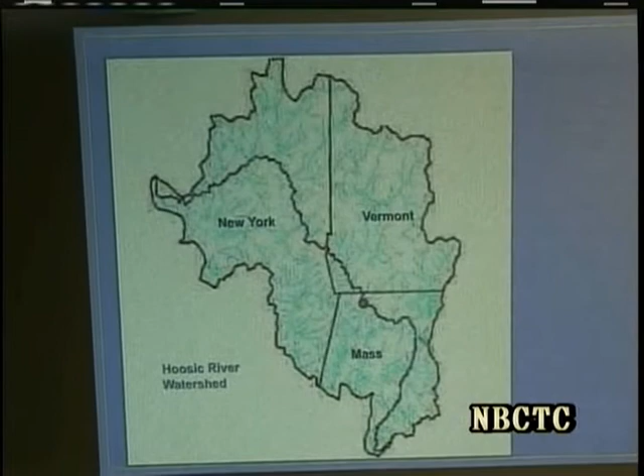Whoops. Ahead of myself. So this is the Hoosic River watershed. The South Branch, the main stem, starts in Cheshire, but the North Branch starts in southern Vermont. And what you should understand about a watershed is that it's all of the landmass that drains to a common point. So what's in the Hoosic River is all the rain or water or snow melt that's coming off from most of southern Vermont and Adams and Cheshire, all draining towards North Adams, and then it goes on to Williamstown and eventually into the Hudson and Long Island Sound.

Here in North Adams, the river has been highly engineered. Flood chutes were built as well as earthen berms to contain the river. So it's a very unnatural system. In the bermed area, it kind of looks like a river, but in the flood chute area, it doesn't. This is directly upstream of the chutes in the North Branch. It looks like a river.

And unfortunately, the river was channelized because of the floods. In the 30s, there were some devastating floods throughout New England. And in response, the community asked the federal government to help contain the flood damage. And their response way back then was to build physical structures that prevented the water from flowing into its natural floodplain.

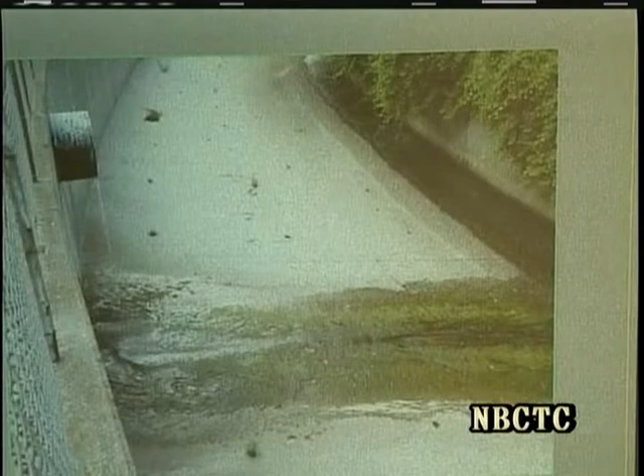So we have here a giant concrete sluiceway that's at a very prescribed slope that moves the water very swiftly and efficiently out of the river and does protect the city from floods. But it also destroys all river habitat and aspects that make a river a river. This section of the Hoosic is considered impaired under the Federal Clean Water Act as designated by the state of Massachusetts. It's on the 303D list, or impaired waters list.

And one of the contributing factors to that impairment is this engineered modification. So the chutes are a mixed blessing. They help prevent floods, but they do degrade the river. They do bisect the city.

And they are very helpful in preventing floods. We certainly saw that during the remnants of Tropical Storm Irene, where the flood chutes on the South Branch filled up a little bit more than halfway. On the North Branch, because there was so much rain in southern Vermont, all draining towards us, they filled up to 2/3, 3/4 full. So they serve their purpose, but they are getting old.

They are made of concrete. Concrete doesn't last forever. They are now several generations old. They're approaching 60 or 70 years. And Milone and MacBroom have looked at the chutes. They have assessed their quality. They're in fair to middling shape. But it seems a good idea to now start thinking about what is going to happen as these physical structures start to degrade. And if we have a lot more Irene-type storms, all that pounding is really going to age them even more quickly.

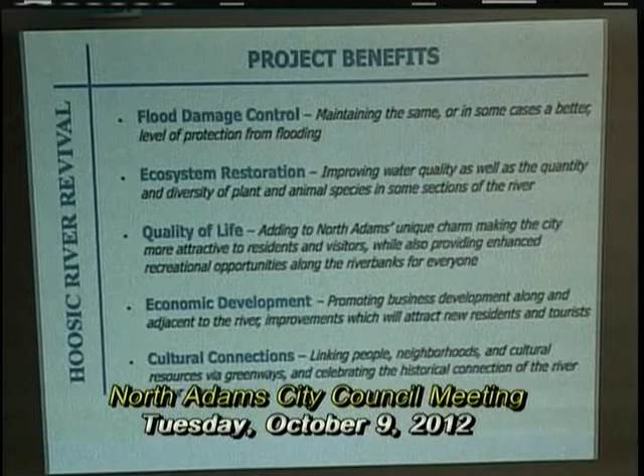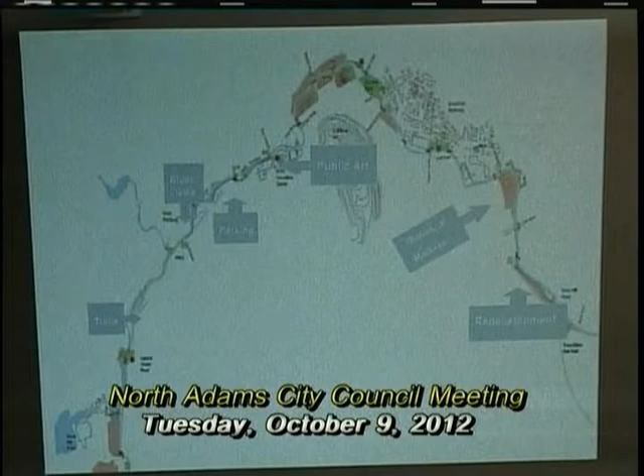And we had in mind not only Los Angeles, but we also had in mind Fitchburg, because they are a couple years ahead of us, and these are the kinds of things that they're doing with their river, which is for the most part also in a flood control situation. Art, historical markers, parking, river views, trails.

And we're now at the point where we have something we can show you. These are very, very preliminary ideas. No decisions have been made. What we are doing is showing you first what some of these ideas are, and we then will be going around the city to anybody who will invite us and talk about these ideas for the flood chutes and for the corridor. And we will have another big meeting in the spring, just as we did in 2010, and see where the city would like us to go.

So, Jim, you want to start? Jim is, as you may recall, the engineer at Milone and MacBroom. So his focus is the flood chutes. Jim?

Thank you, Judy. First of all, it's a pleasure to be here and speak with you. And Judy mentioned I'm a hydraulic engineer, and I specialize in the study of rivers, both in terms of flood control, in terms of the recreation potential, and in terms of naturalizing rivers, in terms of the ecosystem.

And what we began by doing is first collecting information on the river. We think of it as a data collection phase. Then we inspect the river. We inventory the existing conditions along the river and along the flood chutes where it's been modified. Put together base maps that show the physical conditions of the channel based on the aerial photographs and the field walks and plans from the Corps of Engineers.

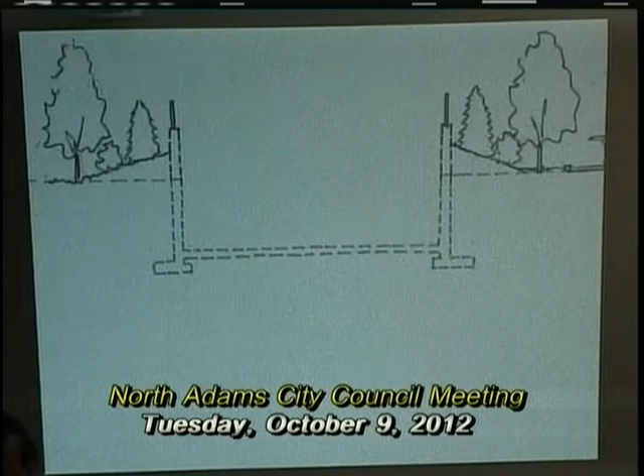And then on the bottom left, you can see how we have some options here, and this is on the screen in front of you now. And this is a change in form. So with this particular type of channel, we would do away with the vertical concrete walls and try to open it up so it's a little bit more people-friendly, and make it more of a playful type of area while maintaining the ability to carry the same amount of water.

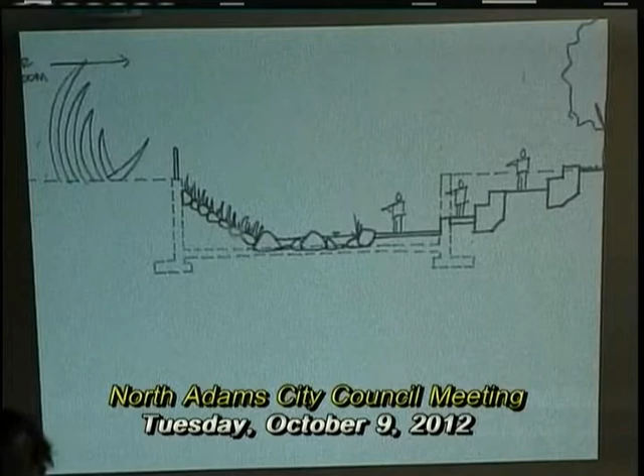And so we have to do this carefully because it is a high-velocity channel. We have to maintain proportions to maintain what I call the physical processes of the river, to carry water and to carry sediment. But this is the type of option you see on some more modern types of urban channels, where you can have walkways and bikeways and sitting areas or amphitheaters actually built into the concept of the floodway, which becomes kind of a linear corridor that goes through the community.

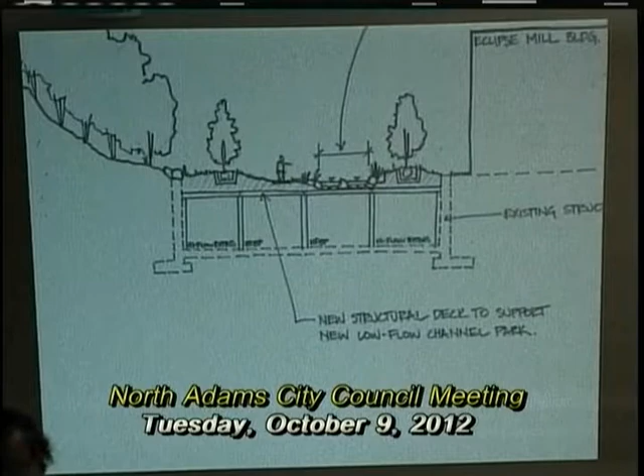And then finally, another type of very broad concept that we introduce is there may be some options here to try to lift up the water elevation closer to the ground, make it a little bit more in contact with people. And if you think about the high dam that's just upstream of the Eclipse Mill on the north branch of the river, the water drops down into a deep trough, what we call a chute.

You could actually skim off some of that water higher up at the dam and have a twin-level type of structure so that you have water flowing on the top in just a shallow, normal flow type of situation, close to people. We can communicate with the water and put the flood water underground. So you'd have like a dual type of system. So these are just some of the ideas we were thinking of.

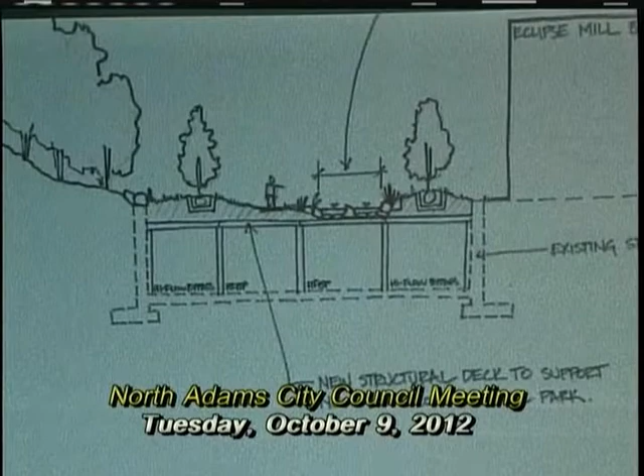And how you apply that really is the next part of the conversation, because it has to be tied in with the social fabric of the community. We can't just take the engineering part in isolation, otherwise we may not gain its full potential. So we work with the landscape architects and urban planners in the office. They actually think in terms of how we connect to the community around it, how we connect to the neighborhood scale. And with that, I'm going to turn it over to Mark Aragoni, my coworker.

As Jim said, Mark Aragoni, I'm the landscape architect, and I get to bring all the colorful, funny pictures. We gave Jim the black and white ones, so I hope everybody's boring now. We can look at the colored ones.

But Jim's touched on a very interesting topic in that we put a team together. So Jim just gave you some of the background and the technical understanding and the engineering that we know went into the flood chutes, and we now know, after seeing the water that was in the flood chutes after the remnants of Irene came through, how important that is. I think over 20 or 30 years of maybe not getting that much water in there, you tend to forget about how important they are.

When we started this phase of the project, very early on, I've been involved in the project for 4 years, so that preceded when the remnants of Irene came through, and you could see the change in the opinion of the flood chutes. I think prior to Irene, there was more of an attitude of, well, maybe we can live without some of the flood chute walls. But immediately, upon our first meeting when we came back after Irene, you could sense and really see the social change that happened in that.

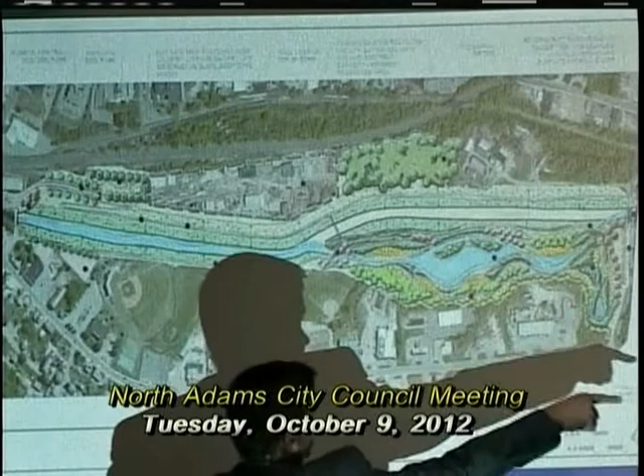And what you're looking at right here is the South Branch segment. If I can jump over here. This is Hunter's Foundry Road over here with the first little dam. There's actually a little hydraulic grade break. Oh, thank you, Judy. There we go. Hunter's Foundry over here. And this alignment right here is the existing channelized section of the river. In that area, it's actually an earthen berm.

One of the initial ideas, I think it was discussed at the community conversation several years ago, was there's an existing wetland, low-lying area that right now is completely disconnected from the South Branch of the Hoosick River, and it's disconnected by an earthen berm. So one of the ideas that we wanted to get on paper was, well, what if we reconnected this wetland system back to the normal flow, or that 90–95% of when we see the trickle running through

the South Branch through here, what if we reconnected that and brought that onto the normal flow line, enhanced that wetland, turned it into an educational area, connected it into the active recreation that's happening in here, looked at extending the trail connection down into downtown, because we all know that potentially that Ashuwillticook is going to head north out of Adams, so there's going to have to be a logical connection. But again, knowing that we want to keep the flood control intact, this concept simply shows the alignment of the existing channelized South Branch right here would stay.

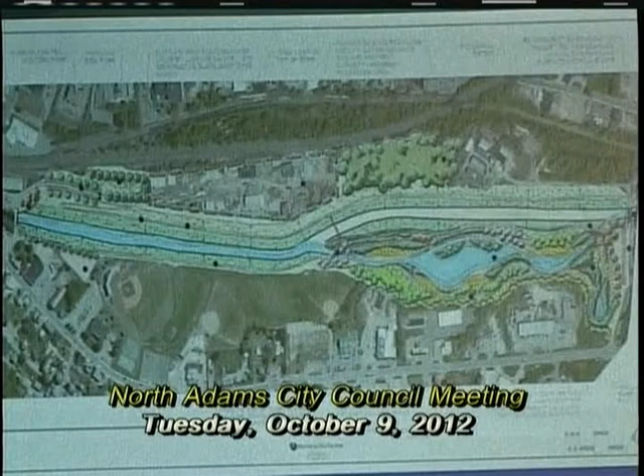So as you can see, that continues down, and we looked at a bunch of different options. This is the steel recycling center here, and do we put on paper that says maybe it can be consolidated? Still active, still uses the rail. It's actually a very functional business because of the location of the rail, but are there some opportunities to make it a little bit better? Look at some of the remediation aspects of it.

We're sitting in City Hall right here. We know the Route 8 construction has been ongoing for a long time. We also know that some parcels down here, other entities within town are looking at as potential redevelopment parcels. So one of the goals of the committee and our group was to make sure we understood some of the other redevelopment projects that are going on in the city and try and incorporate them.

And what you see is really trying to reconnect a green space along the river where we know we have constraints. Jim had talked about the flood walls, and in some areas we don't have the ability to lay back the flood walls and still maintain flood control. But what we do have is the ability to enhance immediately adjacent to the flood wall and continue a linear trail system through here where we have less opportunity to do bigger projects. We do still have opportunities.

An interesting area that popped up in our discussion was if you walk out of City Hall and head down looking into Marshall Street, there's a little parcel here with an existing building on it now, and this is something that we hope people begin to focus on. We've worked on several projects in different areas of New England, and this building right here is now for sale, and it actively functions as almost a hinge to downtown. In a planning study or an urban planner's world, it's a very important area.

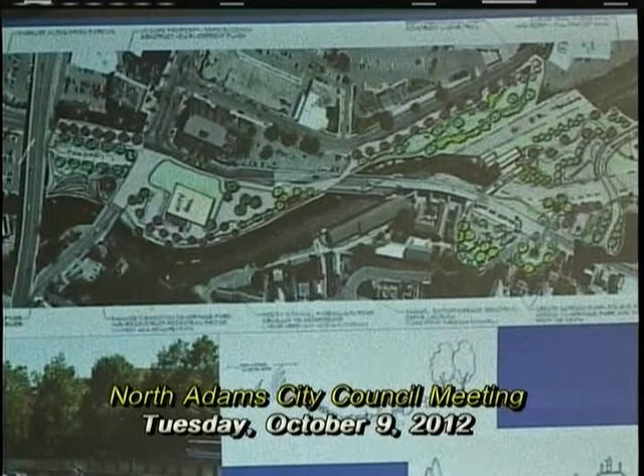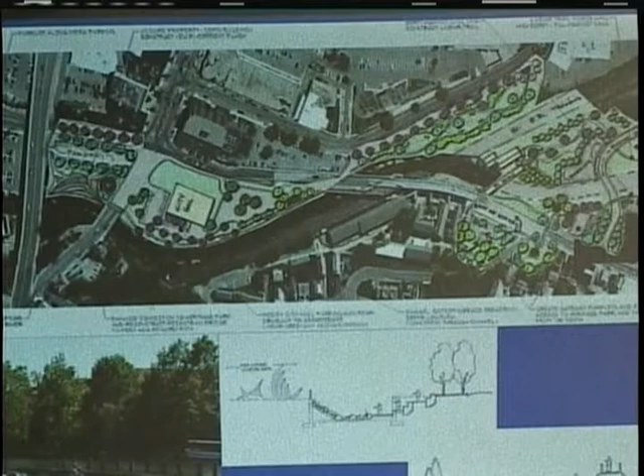And what we looked at is, if you look at the sections, and Jim had showed a section before, there is a potential to reconnect the public with the river by simply doing some hardscape steps. We know that they will be flooded at certain points, so we tried to find some examples of the ideas. So it's still a structural element, able to withstand flooding events, but it starts to bring some civic character, civic gathering space ideas into it. We honed in on this area as a potential focal point and a hinge for the downtown area.

We have, let's see, River Street. We have the porches right here, Marshall over here, the confluence of the north and the south branch over here, and the Mass MoCA building over here. There currently exists a pretty nice green band along here with some private properties on the corner. If you look at the sections down here, we have the large mass of the MoCA building, which really emulates the downtown and the brick masonry. But on the adjacent side, within this parklet, there could be potential to get pretty dynamic, sort of an urban civic gathering space.

We have these graphics available, and we can point you to where you can look at them in more detail. But again, a structural element, yet a civic gathering space, and something a lot more pedestrian friendly. That can also be emulated with different landscaping treatments along the sections of the walls that we're going to keep in place. So it's a balancing act of where we can push the limits and where we have to maintain the structural part, but we all know that as the project gets older, something will have to be done to the structural elements to either be maintained, restored, or potentially modified.

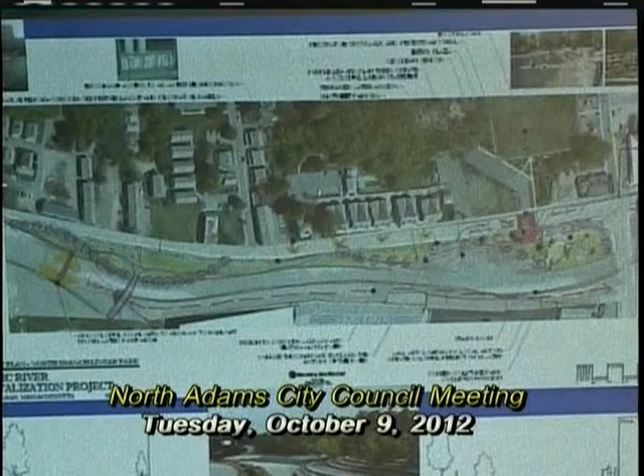This was one of the last concepts that got developed, and probably the one that, I would say, garnered the most excitement. And we're now up at the Eclipse Mill, up on the northern extent of the study area, where we have a dam just northeast of the Eclipse Mill, and right here, under existing conditions, is a large factory building, and then there's some residential structures back in this corner, and there's some commercial structures. There's some vacant parcels down through here.

One of the ideas was, and if you remember seeing this concept when Jim walked you through it, is there a way to bring that low flow back up to street level, we'll call it? And the idea that's illustrated on this concept is to pull water from the elevation of one of the higher dams, pull it off at that elevation, get it to the other side of the street, take down the large factory building, and divert a normal flow or a maintainable flow of water into a created park system on the adjacent side from Eclipse Mill as you come into downtown.

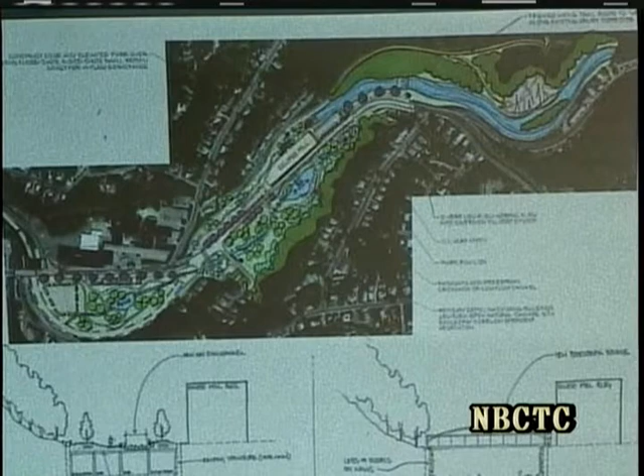It would function as a gateway into the city. Could be the start or the continuance of an Artist Mile or a linear green system all the way downtown. It could provide the benefit and potential to access the trails into the state park. Again, a lot of engineering would have to go into this. Is it feasible? Sure, it's feasible. And these are the things that we started to look at as we developed a preliminary ranking system. We know implementation would be extremely high here.

But some of the benefits: the site would need to be remediated, most likely a contaminated site. The city would benefit from any type of remediation here. This could be constructed in a cap system, so you wouldn't have to get down into the remediation, and those are the details we're starting to look at right now, but we're trying to consider everything. So when you look at graphics like this, the idea is that it generates a little bit more excitement, we hope, and it starts to uncover things that you would never think about unless you put them on paper.

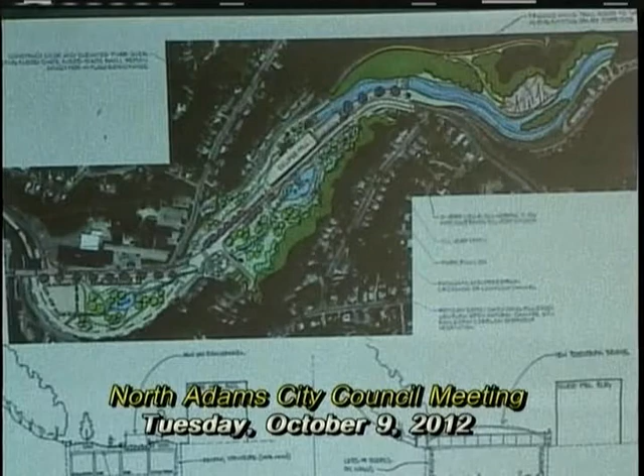And I think that would lead us on to the next steps of the project, where Judy and I just exchanged assessor's mapping, so we can really start to look at properties and some more engineering and things of that nature. So we just wanted to show you 4 of the graphics generated out of this last phase of the study, and we look forward to getting into the next phases of the study. So with that, thank you very much.

Okay. In summary, we have a technical report from Jim. We have adopted the same flood protection criteria that the Corps of Engineers had, so whatever we would consider must maintain the same flood protection. We have these drawings, we have descriptions that Mark referred to. We also have a very detailed grid that tells us the benefits and challenges for each of these possible choices. As I said, we're going to have citywide meetings for the next 4 or 5 months, and then in the spring we will have a community meeting.

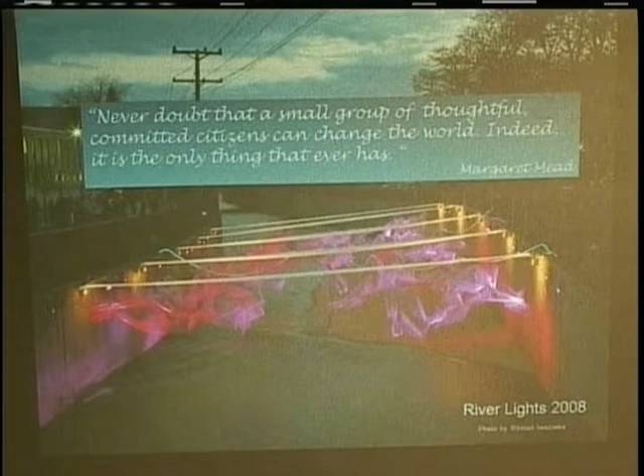So we urge you to get in touch with us, phone, email. Work with us on some of this. It's a lot of fun, and it's very exciting. And we close with our favorite phrase: never doubt that a small group of committed citizens can change the world. Indeed, it's the only thing that ever has. And this is from the River Lights. 2,000 people came downtown, 2008. I think it's a great message. So thank you very much.

And these are the people who've been working on this. We have a packet for you with some of these slides. It's very expensive to make copies of color slides, so you have what we consider to be the highlights. And now we're here for questions. Thank you, Judy. Wait, put the lights back on. Questions from council?

Councilor Harpin. Judy, Mr. Trotter mentioned money and how much this is going to be costing. So far to date, how much has been spent on this project? I know you had a fundraiser and things like that, so how much altogether has been spent to date, and how do you plan on getting the rest of the money? And what do you feel the cost is going to be?

Okay. So far, I would say we've spent $60,000, $70,000, which has been raised. We have received that money from state government, from grants, from individuals, and from businesses. With respect to your second question, what is it going to cost? We're not there yet. Until we really come to agreement on what the city would like to do, it's too early to say. But I have been told that it's easier to raise money when you have drawings. So far, it's been a dream.